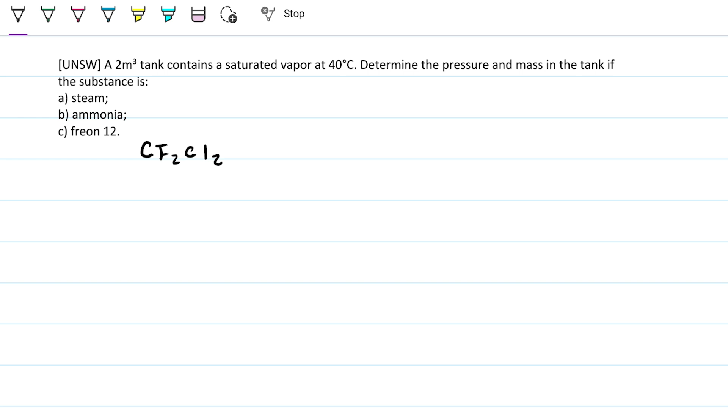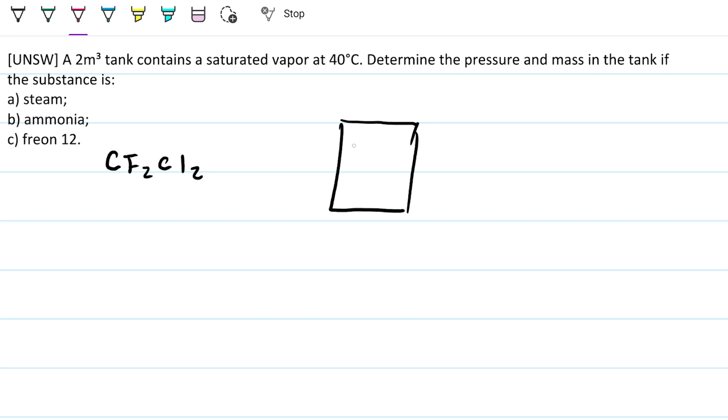So the idea is I have a tank, and regardless of what I have inside, the tank is always going to be at 40 Celsius, and it will always be a 2 meter cube tank. So what will change as we go from one substance to the other is specific volume, right? Because depending on the substance, we're going to have a different specific volume, and that means that the mass content inside will be different, all right? And likewise, the pressure is also going to be different.

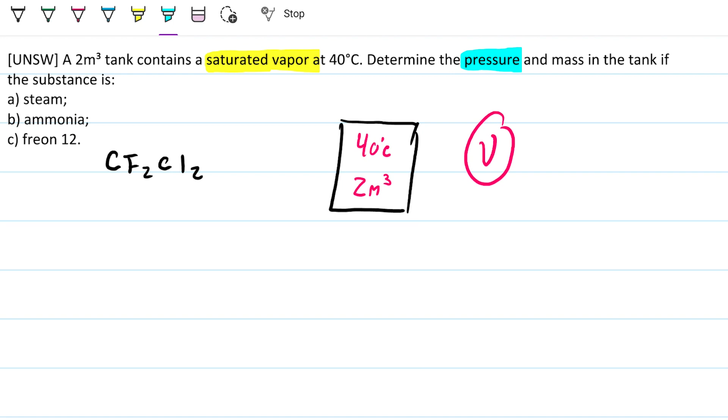So if we have steam, what do we do? Well, we'll go to the steam tables. We're always going to go to the property tables and then look for these two things. Note that we're always on a saturated vapor state. So the saturation pressure is the pressure that we are looking for, right? So that's going to be super straightforward. Whatever pressure we find for that temperature will be the pressure we're looking for, and then the mass, we just need to do a quick math to find out.

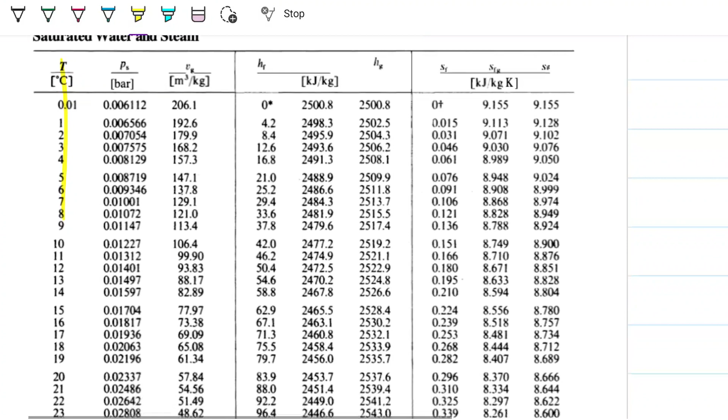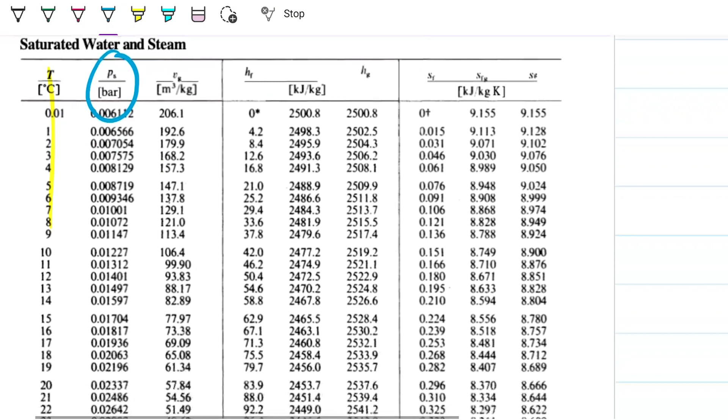So I have my Rogers tables here, and I'm going to go first to water. I'm looking for water at 40. So this is the temperature here, and this is the line I'm interested in. And like I said, the pressure, very straightforward. Whatever pressure is here, 0.073 bar, that is the pressure of my state. So about 7.3 kilopascals or 0.073 bar.

And then for the mass, I take this value here, which is the specific volume in meters cubed per kilogram, the 19.55, and I'm going to use this to calculate the mass of my tank. Just by looking at the units, we can see this is volume by the mass, and therefore, if I'm looking for the mass, all I need to do is take my volume and divide by my specific volume.

So I have 2 meters cubed, that's my volume, and I'm going to divide that by the 19.55 meters cubed per kilogram. I'm going to get an answer in kilograms, and in this case, this is going to be 0.1 kilograms, specifically 0.1023, and it goes on, but we can stop here, and that's going to be the mass in the tank if we have water.

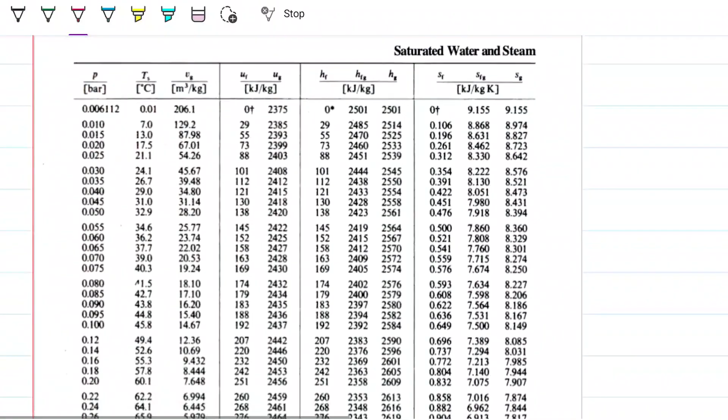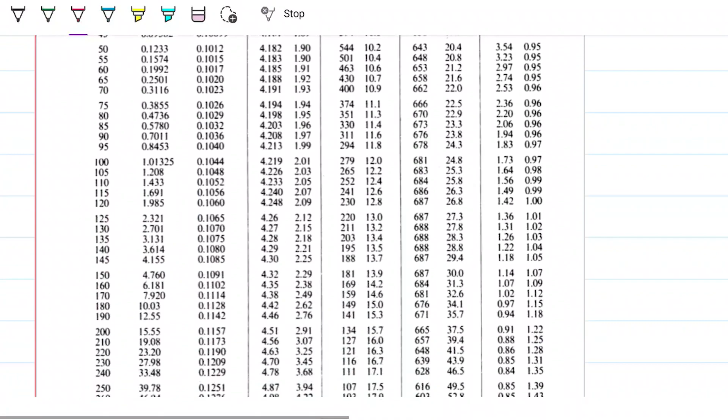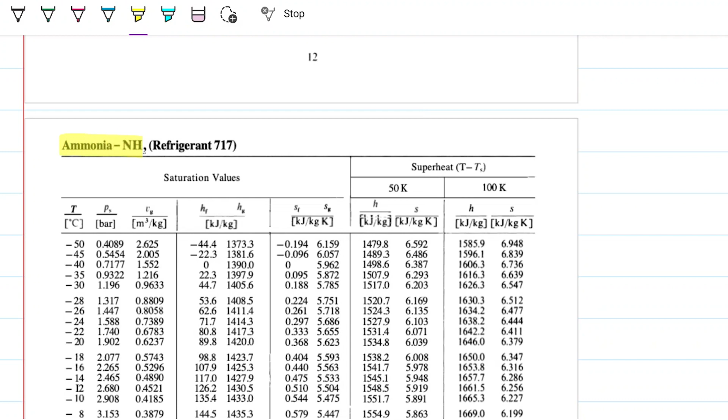Okay, what if we have ammonia? So then, obviously, this table doesn't really do us much, so we need to go out of the water tables and look for tables for other substances: supercritical steam, compressed water, and then there you go. Now we start different substances. So we have mercury here. We have ammonia. And once again, I'm going to go down to 40 on my temperature.

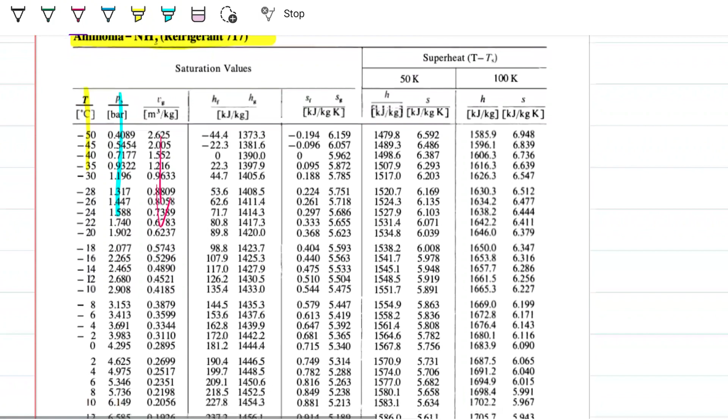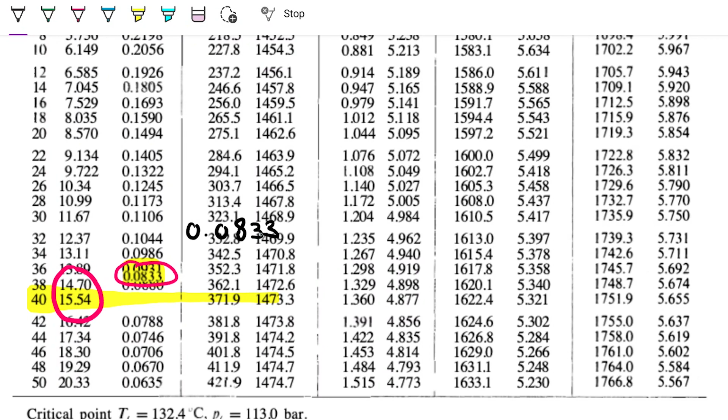Whatever I find on this bar here is going to be the pressure, because this is a saturated vapor. And whatever I find here for the specific volume I'm interested in grabbing to calculate the mass. Okay, so 40, there you go. Interestingly, the specific volume is out of place for some reason, but there it is. And therefore, if it's ammonia, the pressure is going to be 15.54 bars, and the specific volume is 0.0833 meters cubed per kilogram.

Mass will be the volume divided by specific volume, so the 2 meters cubed divided by the meters cubed per kilogram, which will give me an answer in kilograms, and that will be approximately 24.01 kilograms. Okay, so note that under the same conditions, we would have way more ammonia than we would have water in a volume of 2 meters cubed. All right, what else?

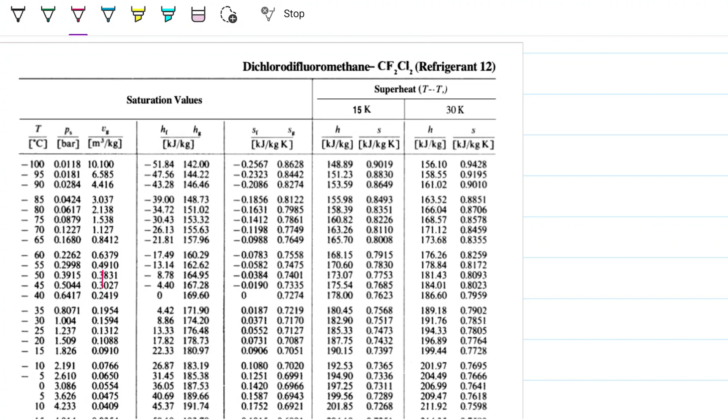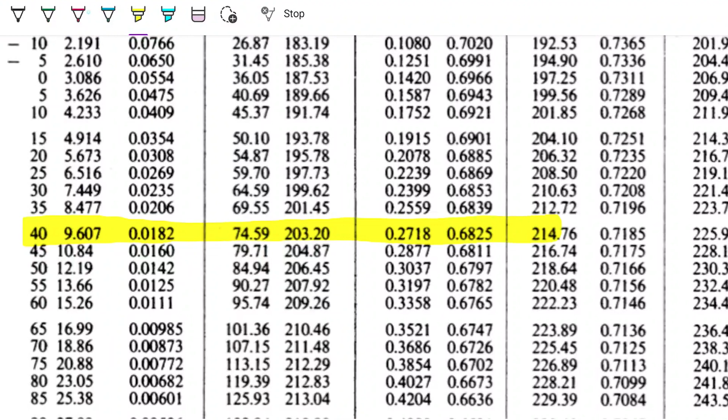Next up is the Freon 12. So same thing, just need to keep going. And we find refrigerant 12, the dichlorodifluoromethane. That's a very fun name to say. Same idea, okay? I'm looking here for 40 on the temperature scale. If these are the properties at 40 Celsius, then the pressure, only because this is a saturated vapor, is 9.6 bar, and the mass will be 2 meters cubed divided by the 0.0182, which is the only thing I need to calculate the mass.

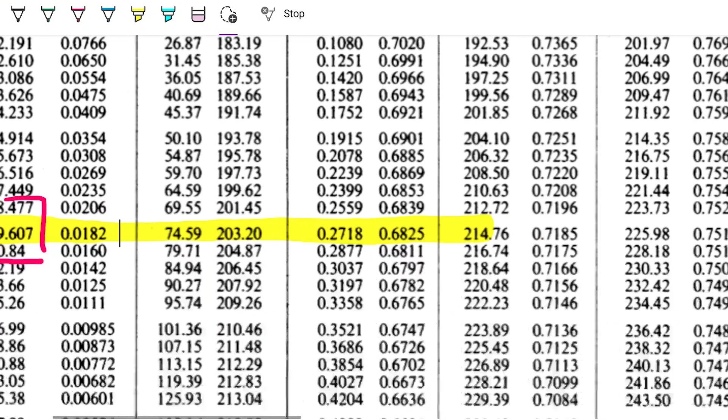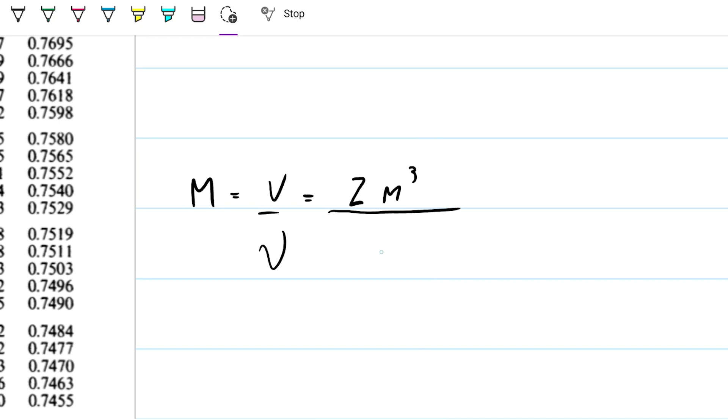So mass will be volume by specific volume, in this case 2 meters cubed divided by my 0.0182 meters cubed per kilogram. Which means that if I were to have Freon, I would have 109.9 kilograms of Freon in there. So note how different it is depending on the substance you have in there.

Okay, so there you have it. Like I said, straightforward question. If we had steam, we would have only about 0.1 kilograms. If it were ammonia, it would be about 24 kilograms. And if we have Freon 12 inside at 40 Celsius, then we would have 109 kilograms in 2 meters cubed. All right, I hope this helped you out.